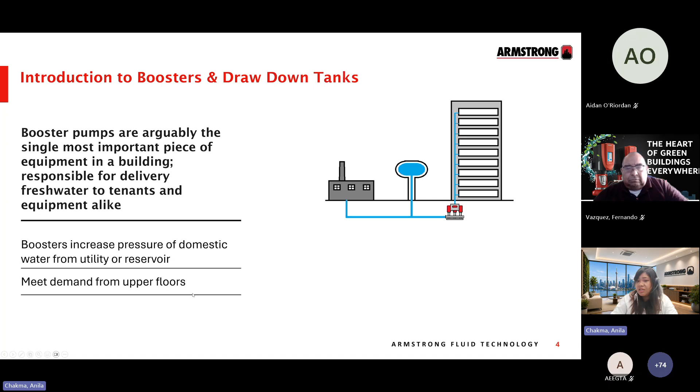The city pressure supply is only adequate to supply the boost pressure up until the first few floors. A booster package's purpose is to provide the additional required boost of water from the city supply line to critical fixtures. Critical fixtures would be at the topmost floor of the building, and in buildings with penthouse mechanical rooms, the critical fixtures may have different pieces of equipment that require the highest supply pressure.

Often, small buildings that have little boost requirement elect to use a standalone pump in place of a booster package. But the concern with that is it does not come with the advanced controls or the redundancy. Before we move on, we also want to discuss the drawdown tanks that we have.

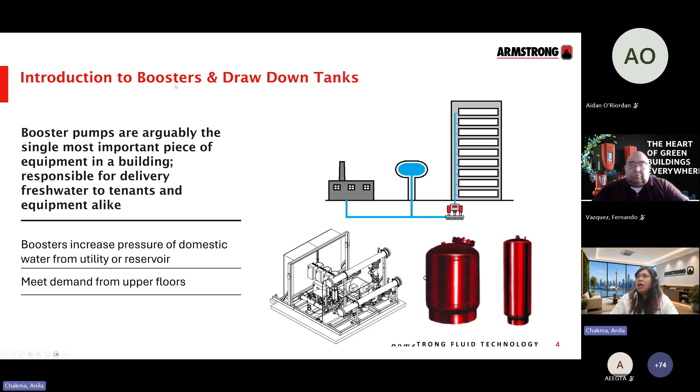Armstrong also provides the booster with drawdown tanks. The purpose of the drawdown tank is to hold additional pressurized water to maintain pressure in the piping system and supply small demands to allow pumps to be shut down. This way, if a toilet is flushed at 2 a.m., the booster package does not have to come on immediately to satisfy the system requirements.

Some manufacturers require the drawdown tank to assist their PID in determining no flow conditions. When the system has no demand, the water being pumped by the booster has nowhere to go but the tank, so once the tank fills up, it signals the booster that the system demand has been satisfied.

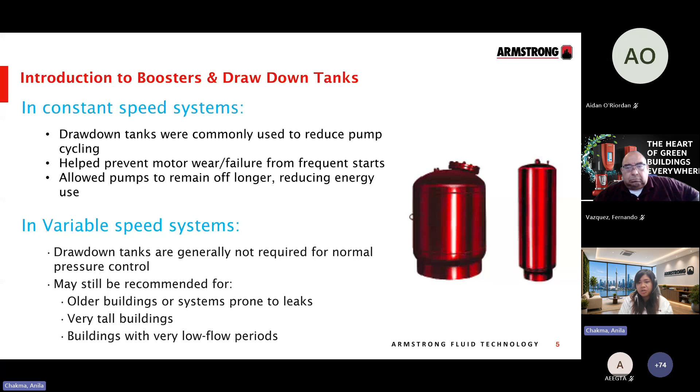Armstrong actually does not require a tank to assist in the shutdown sequence, because with a variable speed booster system, a traditional large drawdown tank is generally not required, as the pumps can modulate their speed to match the demand. However, depending on the application, a smaller pressure tank may still be recommended for pressure stability and very low flow conditions.

We are back to talking about booster pumps. Booster pumps are like any other HVAC pumps, with the main distinction being the specialized controls to control the flow according to the demand load, suited for an open system. So the water leaving the booster does not loop back to the booster. This includes the control logic on staging the pumps and other advanced operational features.

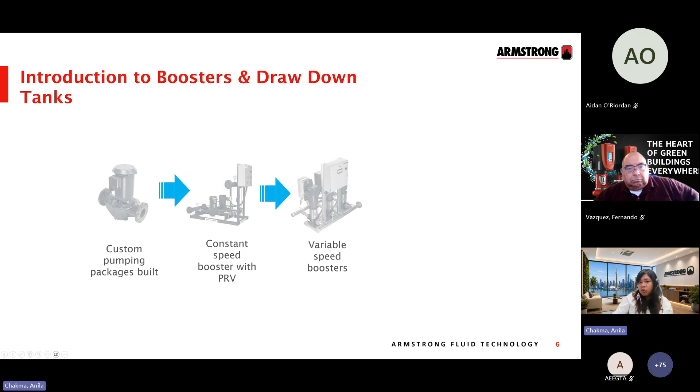We will discuss more as we discuss a solution at Armstrong, but let's focus on how the pumps are looking right now. The good news is all new buildings are going with variable speed boosters, because it's energy efficient and the control is just great for the operations.

Now, if we focus on retrofit and energy upgrades, if you have a building and want to reduce energy use, one easy step you can do is to replace the older system with the most efficient one, and also ensure the upgraded booster is right sized.

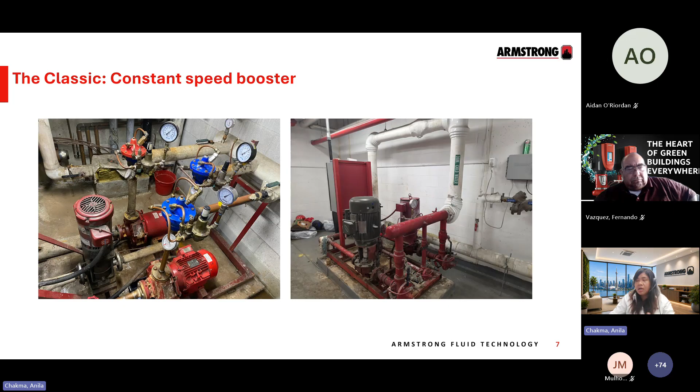The PRV dissipates the excess pressure to maintain a constant downstream pressure, which results in unnecessary energy losses. The booster pump operates at full capacity regardless of actual water demand. I'm talking about the constant speed one. So they often generate more pressure than the building requires.

So what is the problem with all these constant speed boosters? The losses from the PRVs increase the utility cost, and can also contribute to higher water consumption through increased flow and leakage associated with the elevated operating pressures.

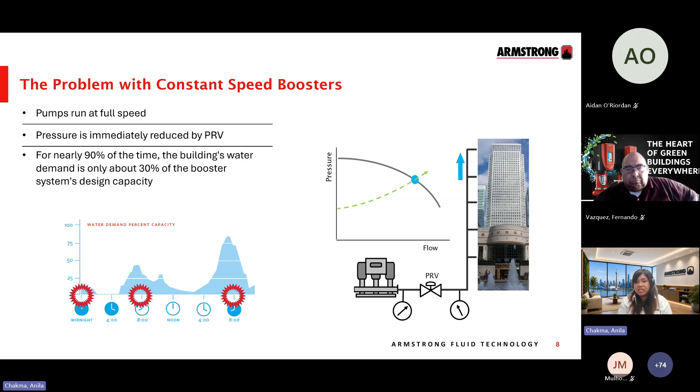Though the traditional PRVs work well, they can cause a lot of problems and additional maintenance cost. The pressure drops across the PRVs can be from 10 to 20 psi. Also, nearly 90% of the time, the building water demand is only about 30% of the booster system design capacity. We need a system that acts with the demand of the building and not running 100% all the time.

Again, just to summarize, what are the consequences of operating the booster system this way? We have higher energy consumption because the pumps are producing pressure that we then reduce through the PRVs. Higher pressure can also lead to more leakage and wasted water, as well as higher water consumption at fixtures. And finally, running the equipment harder than necessary can contribute to additional wear and higher maintenance cost over time.

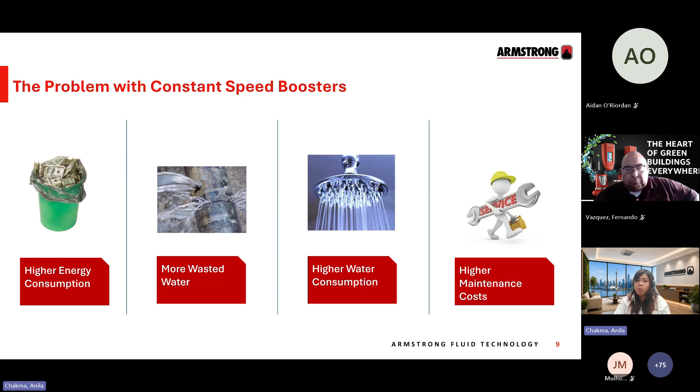Now let's talk about the solutions. Before we go into more detail on the VFDs, it is very important for us to understand what we plan on accomplishing in applying VFDs, because that is the solution. Our primary objectives would usually be: we would like to reduce the energy cost, we would like to reduce system shocks, we would like to be able to monitor the system performance, and allow the user to easily adjust the system to real world situations.

The proposed variable speed booster system eliminates the need for the PRV. That's the first benefit, by continuously adjusting the pump speed to match the building's real-time water demand. And by producing only the pressure required, the system delivers consistent water pressure while reducing energy consumption, minimizing mechanical wear, lowering maintenance requirements, and improving overall system efficiency.

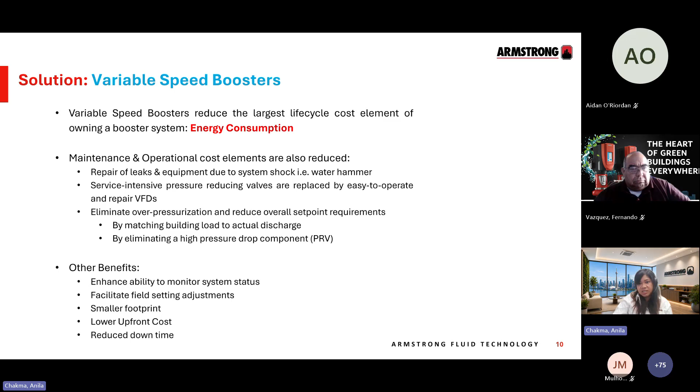Here is a real example of the impact of right sizing and upgrading to a variable speed system from a constant speed booster.

So we had an existing constant speed booster with 3 pumps, that is one 5 horsepower and two 7.5 horsepower. After looking at the building's actual demand and water consumption data, we came up with a solution that is a duplex with 5 horsepower pumps.

So we reduced that. I also put the calculation we provide from Armstrong that shows 75% energy savings, roughly 50,000 kilowatt hours saved annually. With that math, the simple payback is 36 months after accounting for different incentives we may have available from the utility and avoiding repair costs.

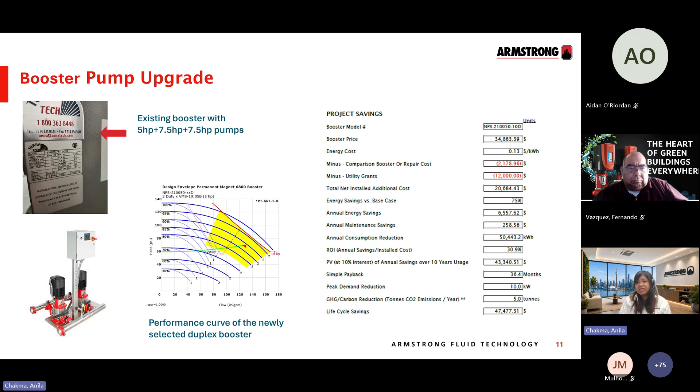This is a good example of why, when replacing an existing booster, we shouldn't just automatically replace it with the same capacity. We should understand what the building actually needs.

We have another example here, and this one was a triplex with three 30 horsepower pumps, for a hotel. So the comfort of the guest is more prioritized. When we sized it, we went with a 25 horsepower triplex set. Again, it's still lower horsepower, and the best part is they received an incentive of around $60,000 from Save on Energy.

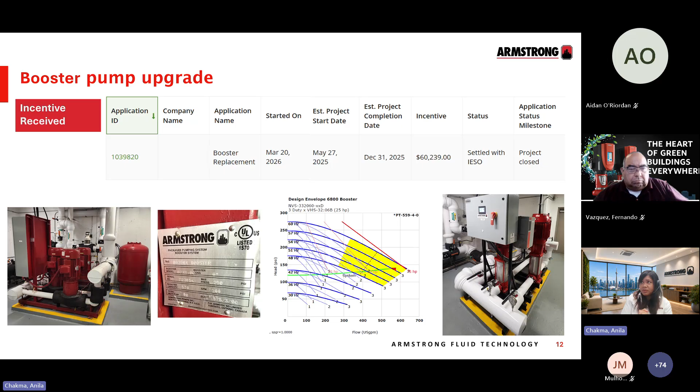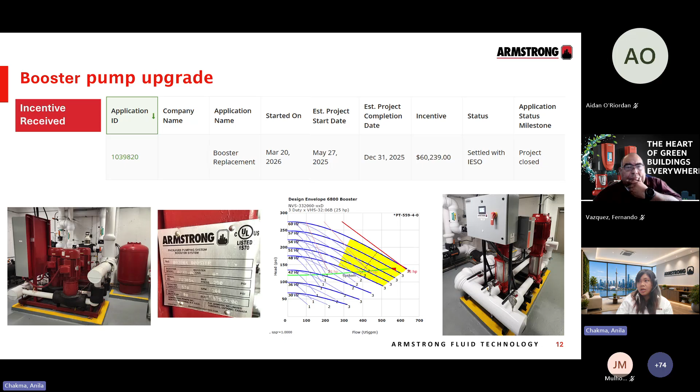We will come back to the detail of the incentive by the end of the webinar. I just wanted to give you guys a look at what we are doing at Armstrong and what we're going to discuss more deeply in this webinar.

All right, so now let's get back to sizing the booster. For boosters, you need two things: pressure and flow. The pressure is relatively straightforward compared to the flow. We need enough pressure to serve the highest and most critical fixtures in the building.

Flow is where it becomes more challenging. There isn't one universally accepted method for determining peak flow, and historically we've tended to be conservative because the risk of undersizing is obvious. You don't want to undersize. Oversizing, as long as it works, everyone's happy. But oversizing has consequences too.

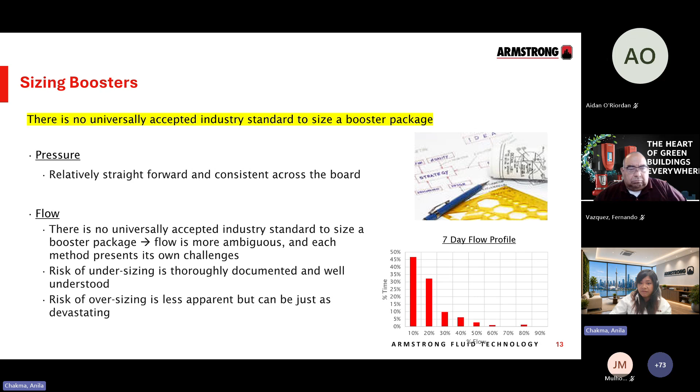As you can see from this typical 7-day flow profile, the building spends most of its time at a very small percentage of the peak flow. So selecting a booster around what happens only at peak condition can mean operating an oversized system for most of its life. That's why understanding the building's actual demand profile becomes so important when we select a booster.

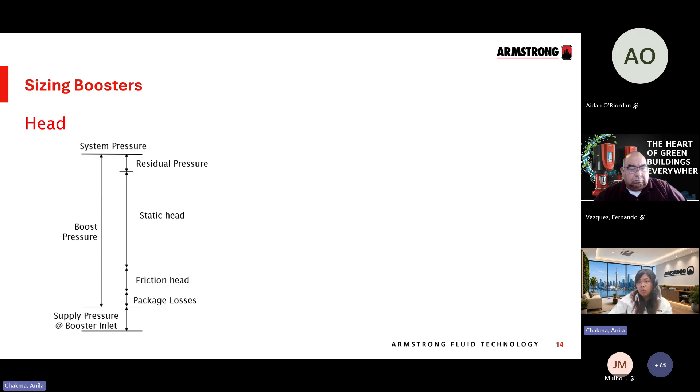Let's start easy with the head, the pressure sizing. The booster needs to provide enough pressure to overcome the elevation of the building, which is the static head, along with the friction and other system losses, while still maintaining the required residual pressure at the top of the building.

We also take into account the available incoming city pressure, because the booster only needs to provide the difference between what is available at the inlet and what is required at the top of the building.

So the method of adding all the required pressure becomes adding the residual pressure with the friction head, the static head, and the package losses, and subtracting the city supply pressure. So pressure is relatively straightforward to calculate.

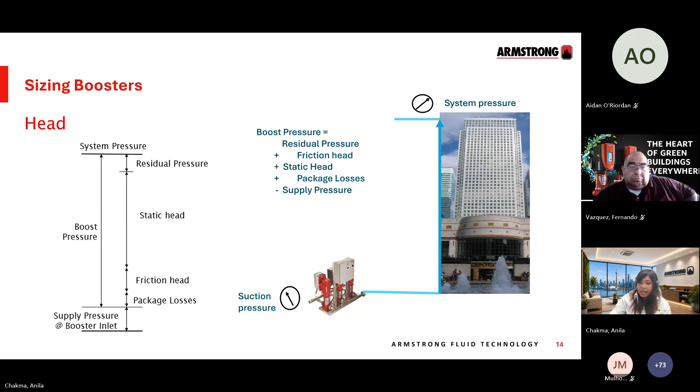Flow, and this is a real life example of a 25-story building in Toronto. The number of floors in this building was 25, starting from where the booster was located to the mechanical top floor of the building. Assuming each floor is approximately 10 feet, the static head becomes 250 feet, adding approximately 10% for system losses, bringing the total to around 275 feet, which is about 119 psi.

We add 40 psi of residual pressure to make sure adequate pressure is maintained at the top of the building. From the total, we subtract the available city pressure, since the municipal supply is already providing part of the required pressure. The remaining pressure is what the booster system needs to provide. In this scenario, that is...

109.047 psi. And starting for the flow calculation easily, we assume a unit in a condo building requires between 0.5 GPM to 0.66 GPM per unit. It's an easy calculation for 317 units, calculating that to be 209.22 GPM.

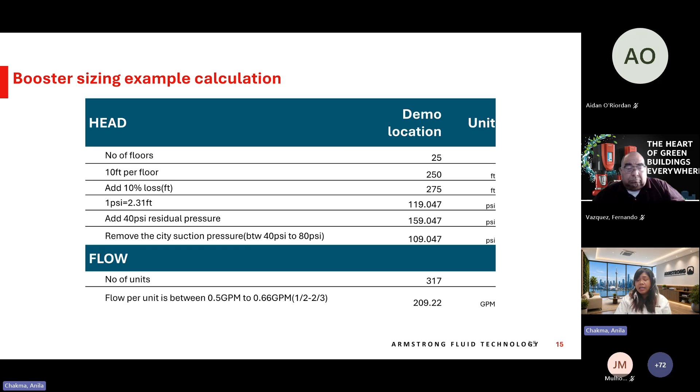But we will discuss how this number comes up and how we actually do the calculation of flow in the field. So the three most used methods are as listed.

First is keeping the existing sizing. The motto is like, if it's not broke, don't fix it. That's how a lot of the older buildings have been performing, and we are losing energy through it.

This is only feasible for retrofits, does not apply to new construction, and does not account for upgrades that might have been added to the building or existing boosters since installation, such as adding high efficiency fixtures so you don't need as much flow, changing supply pressure, renovation, or the existing booster may be oversized, plus system leakage that has been going with this booster since it started.

The second method we have is measurement and verification. This is the most accurate means of determining flow, but only under the right circumstances. This is also only feasible for retrofits, does not apply to new construction.

This process is very dependent on project specifics. There are some measurements that may not be available. We look at the water consumption bill, but the flow rates don't represent full demand of the building when fully occupied. Let's say you put a flow meter in, but at that time the building was not fully occupied.

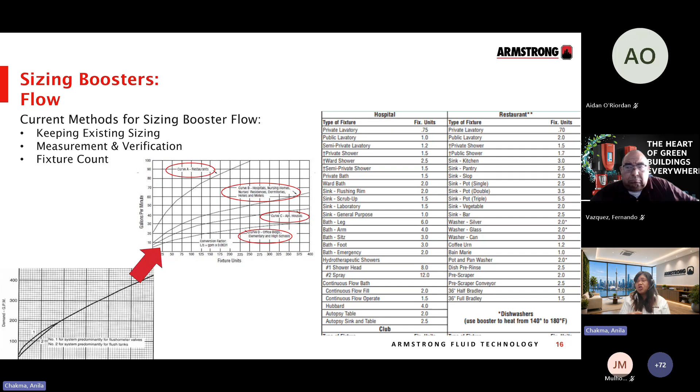The other one is the fixture count method, and this is the most common method being used. It assigns a weight to each fixture type and converts total fixture counts to flow rate. The issue is that it's a bit outdated, and also you are not running all the fixtures at all times. So all of these methods eventually oversize the flow that a building requires.

We're going to talk more about the challenges that come with the first two methods: keeping the existing sizing, and measurement verification.

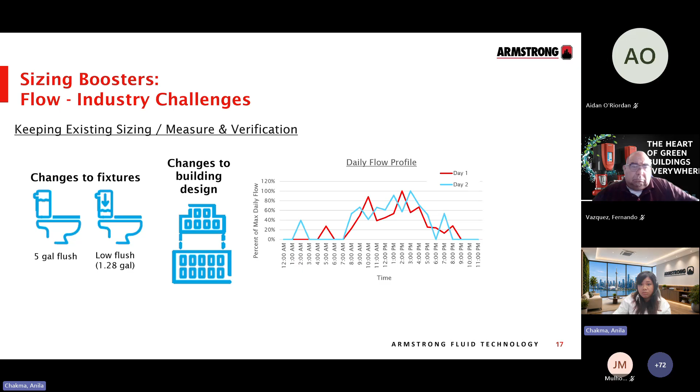Changes of fixtures, like going from a 5-gallon flush toilet to a low flush where you need less water. Changes in the building design - a building can expand, the units may get distributed differently, it can go down or up. Also, the daily flow changes from time to time, changes in standards and codes happen from time to time.

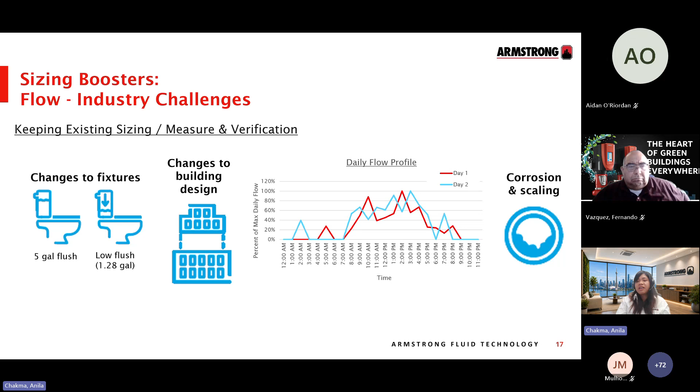The theoretical calculations could not be extensively tested on very high fixture count scenarios like high-rise buildings. Over time, corrosion, scale, and debris can build up inside the piping, restricting water flow and increasing pressure losses. This can affect the flow and pressure that the booster system needs to provide.

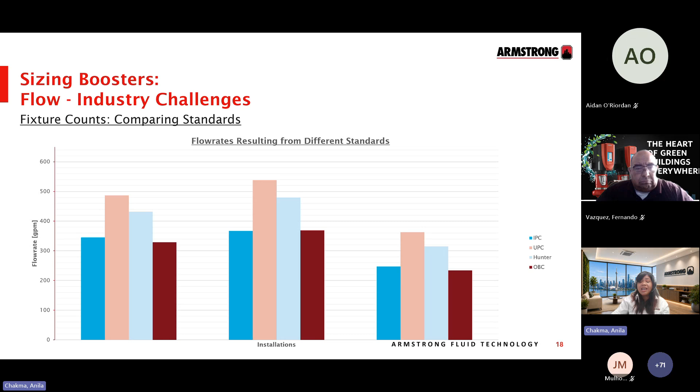Technically, different standards give different estimates, all of which are oversized. For example, for the exact same building, one standard gives us 480 GPM while another gives 330 GPM - that's about a 45% difference.

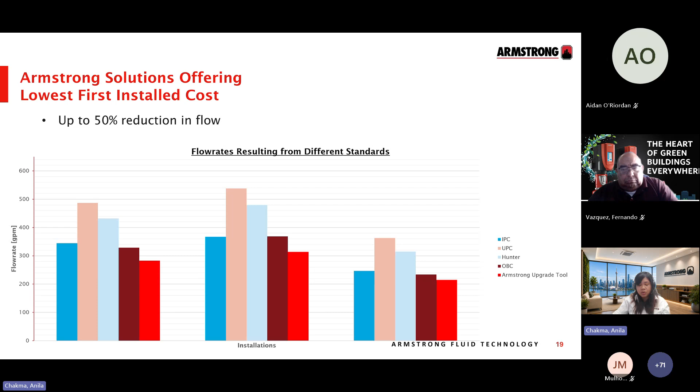In this graph, we've included what we get from the Armstrong Upgrade Tool. You can see that the Armstrong tool results in a lower required design flow, up to 50% lower in some cases, depending on who you're comparing it to. This allows us to right-size the booster system and potentially reduce the initial equipment and installation cost.

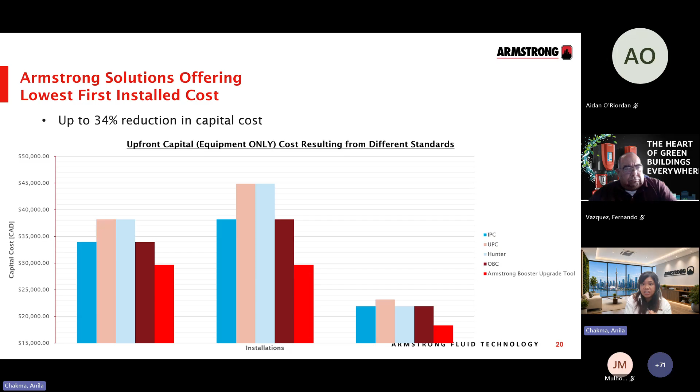Here we are looking at the capital cost. So if you were following the flow and head of the standard that's available and comparing it with what we came up with in Armstrong, you can see there's a 34% reduction in capital cost and a 49% increase in annual energy savings.

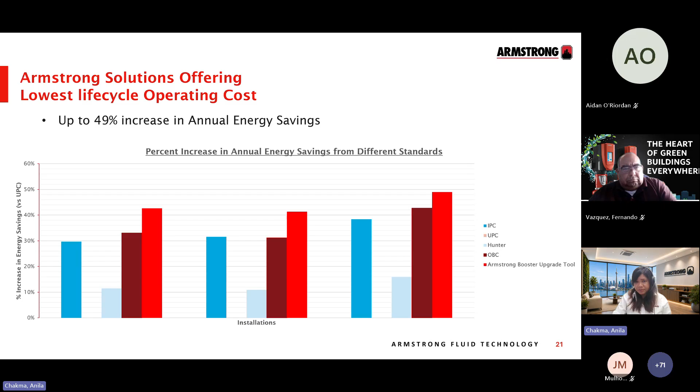By selecting a booster that better matches the building's actual demand, we reduce the life cycle operating cost. Overall, right-sizing gives us a smaller design flow, lower upfront cost, and greater energy savings over the life of the system. So how did we achieve this energy savings?

Simply by focusing on the pump affinity laws. Flow changes directly with the speed, so if we reduce the pump speed by 50%, the flow also reduces by 50%. Pressure changes with the square of speed, so that same 50% reduction in speed gives us about 75% reduction in pressure. The biggest impact is on energy, because energy changes with the cube of the speed. So theoretically, reducing the speed by 50% can reduce the power requirement by about 87%.

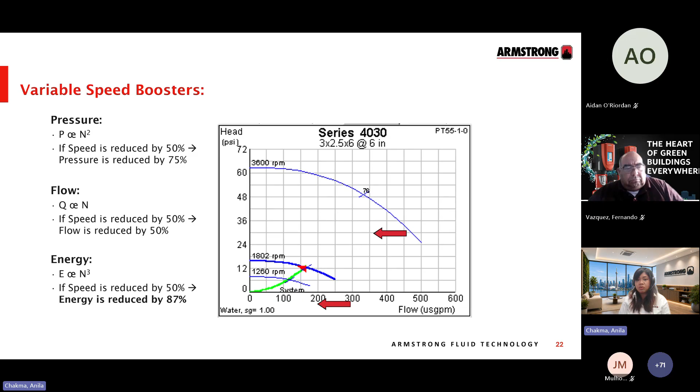This is why variable speed operation is so important. When the building doesn't need full flow and pressure, we can slow the pumps down instead of running them at full speed, which significantly reduces the energy used.

The fact is that HVAC and plumbing is dominated by part loads. In the past, we would size equipment to full loads as we did not have the proper technology. But with technology advancement, with redundancy and everything, we don't need oversized equipment anymore. Oversized equipment has poor efficiencies because most of the time those equipment would be running at full load only a very small fraction of time.

The industry has been implementing solutions that take advantage of the part load phenomena, and energy savings come with it. Once the flow and the head of the booster package is determined, the values can be easily entered in our Armstrong Adapt tool to give you the various booster options. So you put in the total flow that the system needs to work with, the suction pressure you are receiving.

And the boost pressure that it requires. You can go with standby, but the more we focus on running our pumps efficiently, the less we need standby or redundancy. A shift towards lead and lag operation is taking place. Modern boosters still use N+1 redundancy, where active duty pumps are at the same specification, plus an additional pump for redundancy. But the best situation is if you're not keeping one pump just sitting there. If you were running two pumps at 30% instead of one pump at 60% of its capacity, that gives us more energy savings and uses less energy.

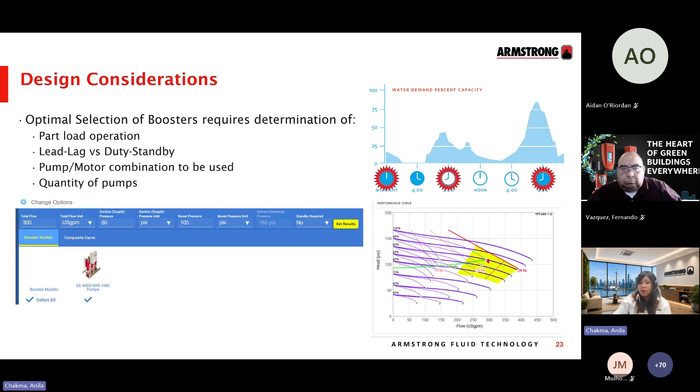The least number of pumps and the smaller horsepower motors would be adequate for lower cost. Now, as we have discussed what we found using the Armstrong booster sizing tool, this is to introduce you to the Armstrong booster sizing tool. This tool can be used for both new booster sizing and retrofit applications, but it's more efficient and has more tools to calculate and compare with an existing booster than a new booster system.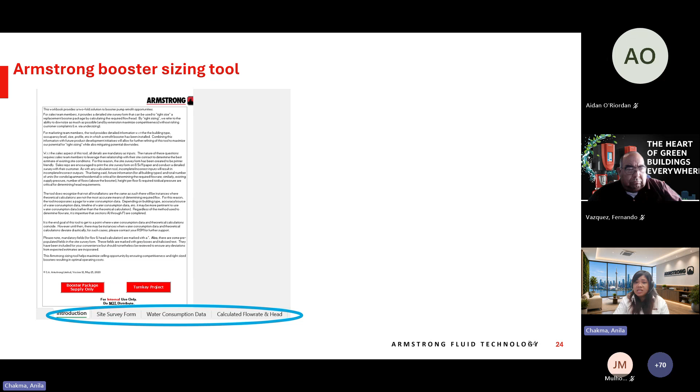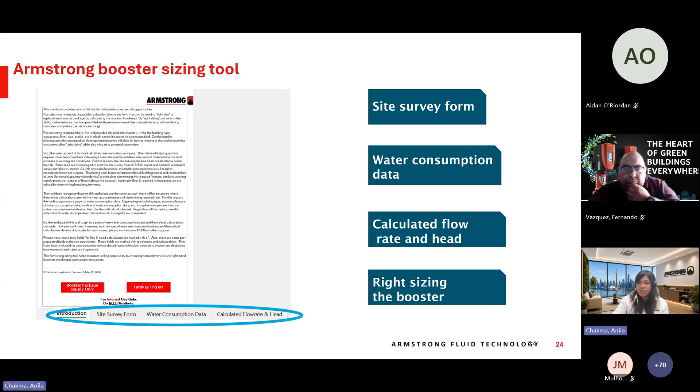The process starts with gathering information using the site survey form, along with the building's water consumption data. Using this information, we determine the building's actual flow and pressure requirements. Once all the information is analyzed, the tool provides the right-sized flow and head requirement, which we then use to select the appropriate booster system.

So when we are evaluating the existing booster pressure for the booster sizing tool, these are some key pieces of information we want to collect: the suction pressure coming into the booster, the discharge pressure, and the existing flow capacity. For discharge pressure specifically, we can look at the nameplate design pressure, take actual readings from the pressure gauges, and if there's a PRV, record the pressure both before and after it. A lot of existing systems may not have that, but if they do, it shows how much pressure you're losing at that point.

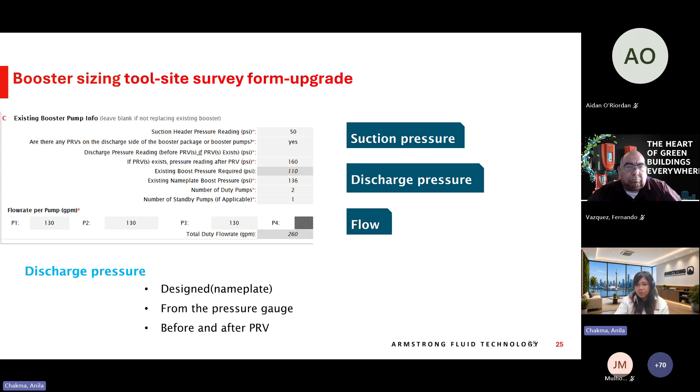The difference between the pressure coming in and the system pressure required actually shows you how much pressure you will be needing. Now, moving on to flow, again we are trying to count the fixtures. We need the number of units so we can understand how many bathrooms each of these units have, along with other fixtures such as washing machines, dishwashers, laundry tubs, or kitchen sinks available in the building, from different units to public fixtures like dishwashers, hose bibs, or laundry tubs for the whole building to use.

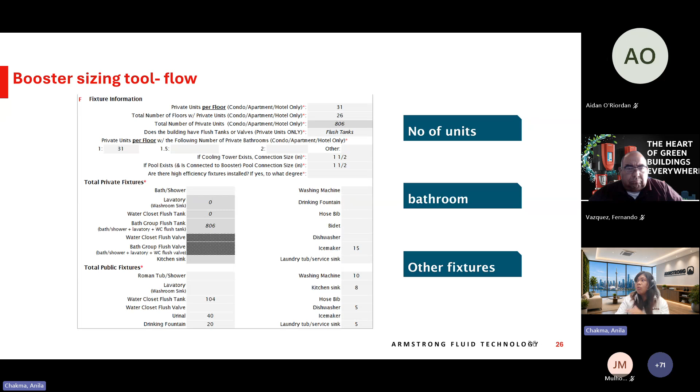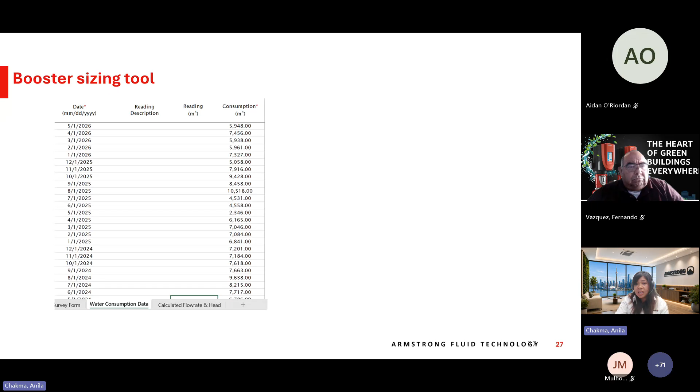So putting all that into calculation, the most recent addition to our booster sizing tool is the ability to analyze the building's actual historical water consumption. Ideally, we collect 1 to 3 years of water bills, with at least 12 months being the minimum. The sizing tool uses this information to estimate the building's peak water demand rather than relying on theoretical fixture calculations.

This gives us another data point to help avoid both over and undersizing and select the booster that better reflects how the building actually operates.

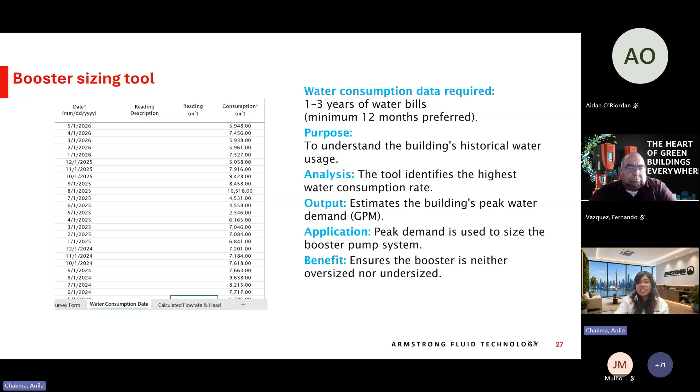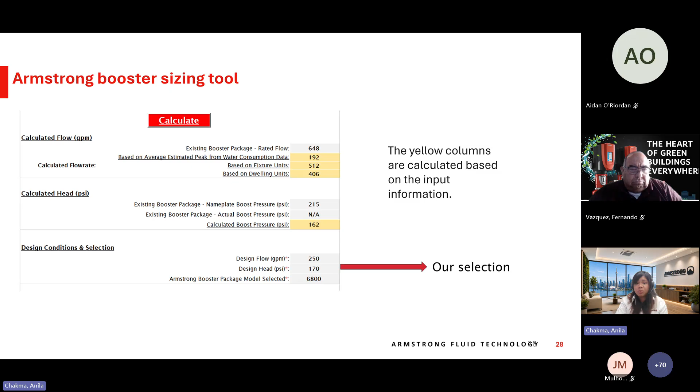Once we enter the building information, the fixture counts, existing booster data, and historical water consumption, the sizing tool compares the existing methods and calculates the expected flow and pressure requirement. Then we review these results with our end users and service partners, and make the final booster selection. So the overall goal is to combine the theoretical sizing with actual building data to select the booster that better reflects the building's real operating needs.

Coming back to why right sizing is so important, oversizing is so common, and the impact of an undersized booster is immediate. Oversizing is less obvious and may happen over time, but it has real long term consequences including higher energy use, increased water consumption and waste, additional maintenance, and potentially reduced occupant comfort. So bigger isn't necessarily safer or better. The goal is to select the booster that actually matches the building's need.

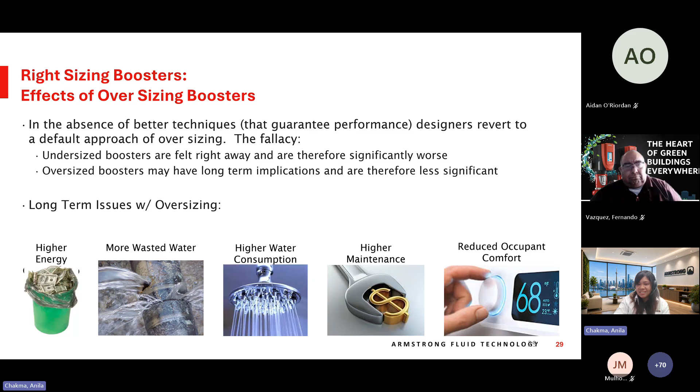I'll quickly touch on the EPIC calculation, that is the ROI and energy performance improvement calculator we have at Armstrong. It compares the existing booster pump information with an efficient variable speed one, and then provides output with estimated energy savings, estimated annual cost savings, estimated reduction in GHG emissions, and simple payback periods.

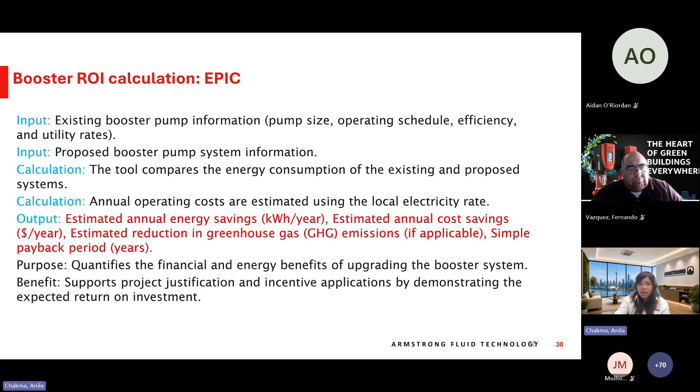Going back to the example we've used, if you take another look at this ROI report, you can see 75% energy savings, that is around 50,000 kilowatt hours annually, and the simple payback, including the incentive and avoided repair cost, is around 36 months.

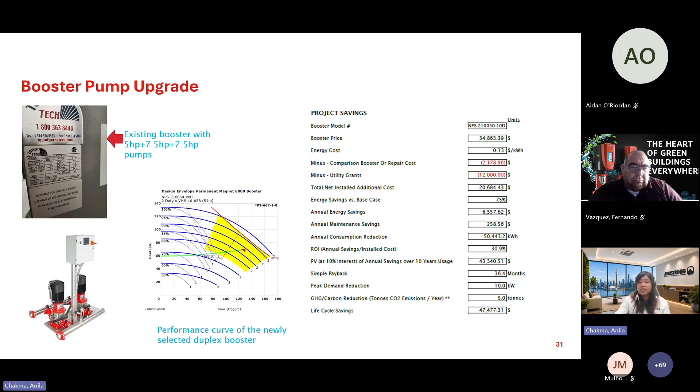So what do we have in Armstrong booster packages? We offer configurations from duplex through quinteplex, with 5 pumps in one package, with both duty-duty and duty standby operations. Our packages use design envelope permanent magnet motors with NEMA ultra premium efficiency.

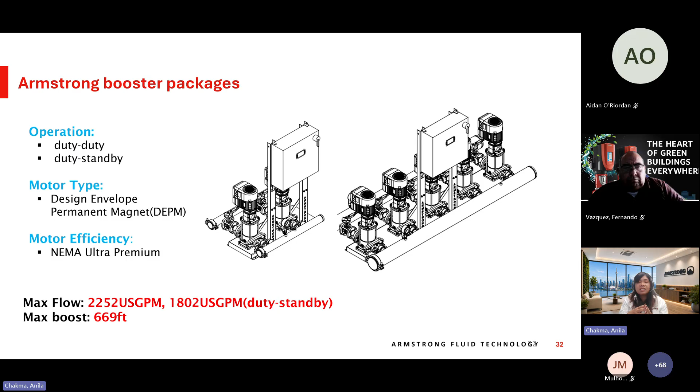Depending on the configuration, our Armstrong booster can handle up to 2,252 US GPM, and boost pressure up to 669 feet of head for duty standby, that is flow around 1800. This gives us the flexibility to serve anything from smaller residential applications to much larger buildings. The smallest we have is 1.5 horsepower duplexes, and the highest is 60 horsepower each pump.

I have a few slides showing the efficiency advantage of our DEPM motors at both nominal speed and part load operation, around 50% speed. DEPM motors maintain significantly higher efficiency than conventional induction motors with VFDs. Again, this is a comparison between Armstrong and Armstrong, but instead of the induction motor, now we're using permanent magnet motors, the ECM motors, and this translates to meaningful energy savings.

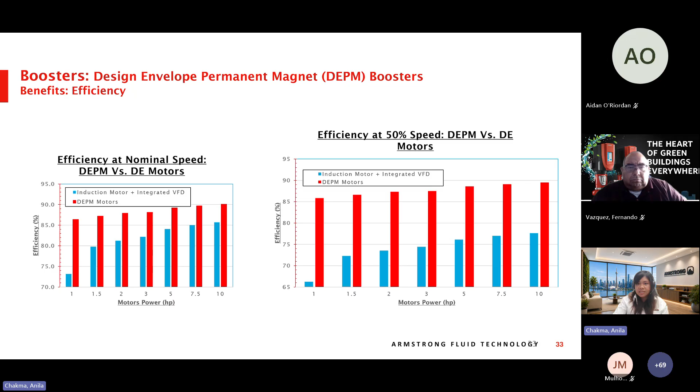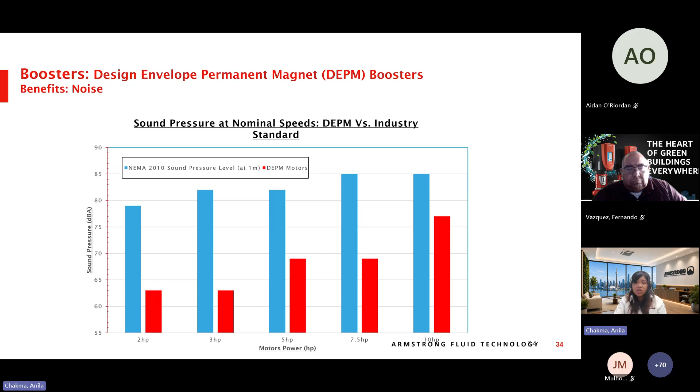Here's another benefit showing lower noise, as the graph shows across different motor sizes. DEPM motors operate at noticeably lower sound levels compared to industry standards. This is very valuable for residential buildings where some units are right next to the mechanical room, so mechanical room noise can be reduced.

Another benefit is reduced weight, so it's easier to transport, handle, and install. Also, I know a lot of our end users and service partners ask about lead time. Our DEPM lead time is around 12 weeks right now. At Armstrong, we're taking lead time very seriously and trying to support getting boosters delivered at the shortest lead times we can provide.

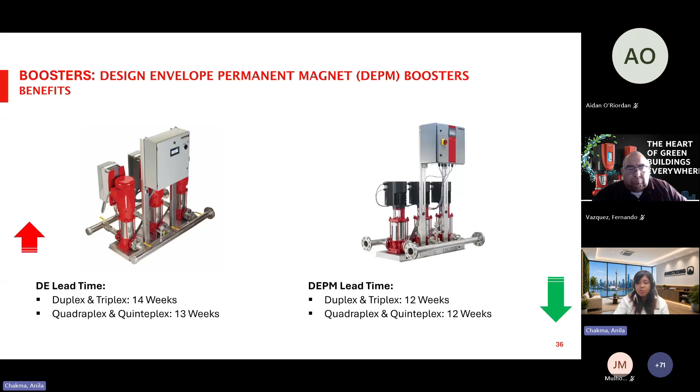Now another interesting part. You might already be familiar with incentives available in Ontario right now. I'm focusing on Ontario, and Armstrong actually provides end-to-end support. We help you identify what kind of incentive might be available. This applies not only to boosters, but also to our different pumps and optimization tools that we have available.

So we assist you with all the application and support you with anything that might be required from whoever is giving out the incentive.

In this case, I want to focus on what we have in Ontario with the Save on Energy program. For boosters, that's the prescriptive incentive for replacing an existing constant speed domestic water booster with a variable speed system, which provides 1200 per horsepower incentive, up to 100 horsepower. Both Armstrong DE and DEPM booster packages are available. As shown in the example, the 12 horsepower system would receive $14,400 in incentive.

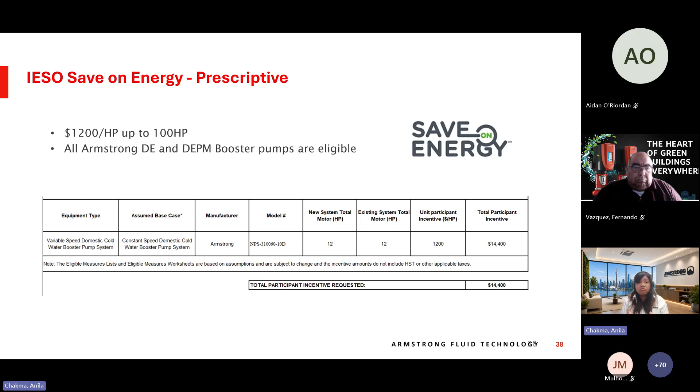And this is an example that we have actually worked to get the incentive secured for our customer, around $14,400. This is the email we have to support the end user as applicant representative, as the application needs to be from the end user. So again, that's the email. If you ever have any questions about incentives, you can keep this and you can reach out to us.

That's not the only place you can go for support. As an energy management engineer, I focus a lot on retrofit projects, and Fernando with me focuses on supporting a lot of our Armstrong service partners, and he has been with the company for so long. If you have any questions, anything you want to bring to our attention, you can always reach out to me or Fernando.

That brings me to the end of this webinar. Hope we are still good on time. So we'll be taking any questions you may have on booster selection, energy savings, incentives, or any specific projects.

Thank you very much, both of you. That was very, very interesting. I have a couple of questions in the chat, and please, any of our attendees, feel free to add some there. Andrea Dwight asks, what is the payback without incentives?

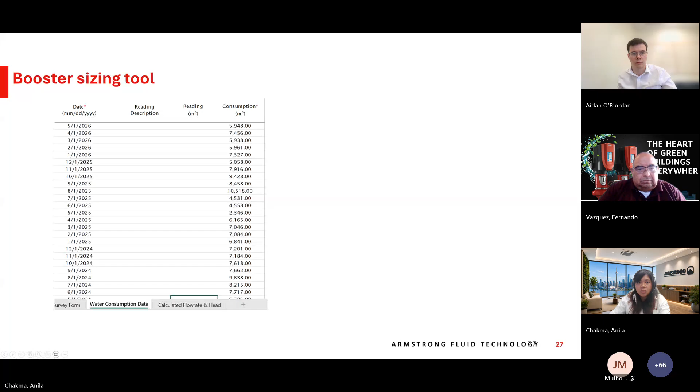Happily, I will just go open the presentation real quick and share it so I don't forget. Here we have the shared screen and here we have the presentation. Going back to... okay, I think we went a little too far. Okay, all right, here is the calculation.

So the annual energy savings is 6,557. In this scenario, we have calculated the energy cost at $0.13 per kilowatt hour. And the calculation multiplies that with the annual consumption reduction of 50,000 kilowatt hours, and that's what gives us this number, and that's what shows in the percentage. So this savings happens when you take into consideration the variable speed, because you will be running your pumps at part load, not full load.

And it also takes into consideration the permanent magnet motors that we are using in our boosters, and any repair costs. Most important, the PRVs — you are eliminating the PRVs where you are losing 10 to 20 PSI. So the PRVs, the part load operation, and the permanent magnet motor all give us this reduction number.

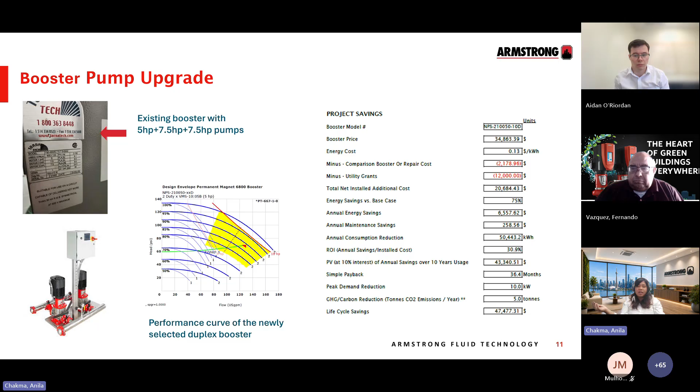That's the 50,000. And when it comes to incentive calculation, if you want to go with custom application instead of prescriptive, Save on Energy asks us how we got these savings, and we go into detail. We've had a lot of our incentives approved by proving this reduction. I hope that covers what you were asking for, Barry.

So, Faisal, I think that might have answered your question. If not, let me know.

Vladimir Marinich asks, are your motors generally off the shelf or exclusive to one manufacturer? Fernando, you want to answer that? Sorry, you're asking me if... Are your motors generally off the shelf or exclusive to one manufacturer? Oh, no — the boosters are built on order.

We're trying to work on stocking some popular models, some popular sizes, and then through software adjust them for the application. But today they are built on demand.

Yes, thank you. And Chris Barry had a follow-up question: wouldn't the majority of the savings be realized by changing the pump runtime? Yes, that's what we change — the runtime. So our calculation looks at the load.

So maybe the pump is running at some percentage, and it also varies on the type of building we're looking at — a hospital building or an apartment building will not have the same load. So we've standardized this calculation based on the load. Maybe a hospital is running 70% of the time at 5 or 10 hours, 30% at 7 hours, or 10% at 12 hours. That's how we establish this calculation and the savings.